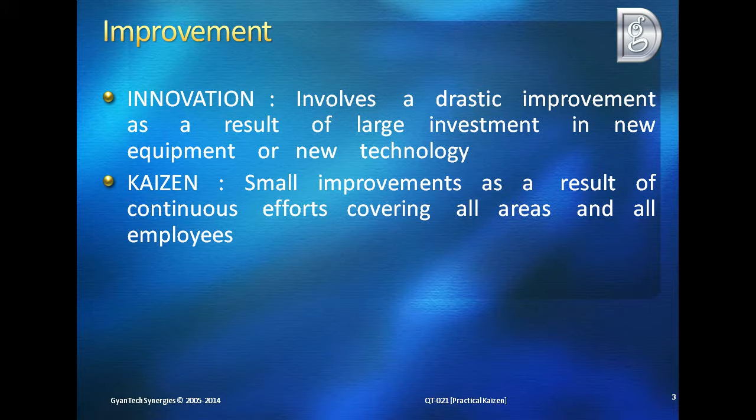Kaizens carried out in various plants of Suzuki Group have been compiled. Look for ideas which you can implement in your area. These Kaizen ideas have been categorized under the following groups:

Space saving, operation improvement, energy saving, weight reduction and making things compact, material storage and handling, quality improvement, 5S including environment protection, safety and accident prevention. Improvements in these areas will help in quality improvement, productivity improvement and cost reduction.

Space saving. Cost of space is a hidden cost. Cost of new covered space is of the order of rupees 7,500 per square meter. Add to this all the recurring expenses associated with space, such as expenses for lighting, air cooling and cleaning. In addition, when space is available, we tend to keep all unwanted things. This reduces our efficiency as more time is required to select the required item.

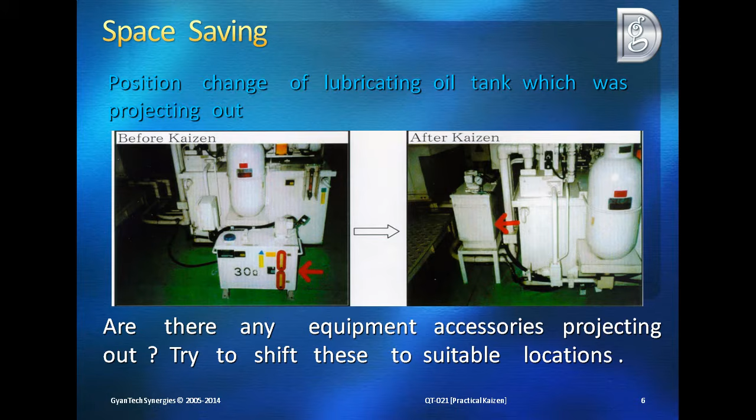Let us see the first example. In this case, a lubricating tank which was projecting out has been shifted to a location where it is not projecting out. Here, a hydraulic tank lying on the ground has been placed on top of the part shelf.

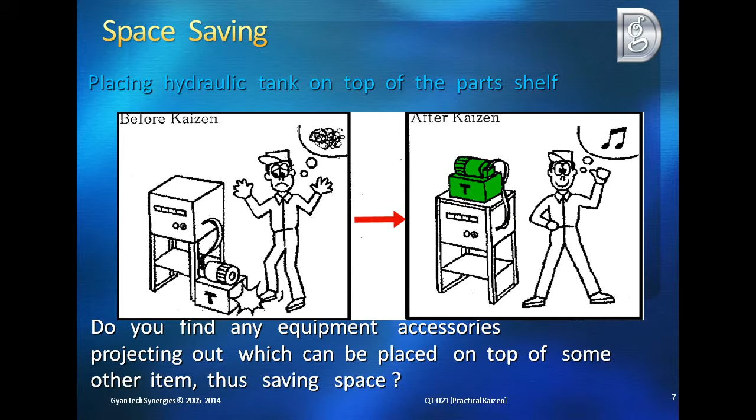Fans kept at ground level occupy space and cause obstructions to man and material movement. In addition, such rotating equipment and wiring associated with these are safety hazards. Fans should be mounted on pillars or ceiling.

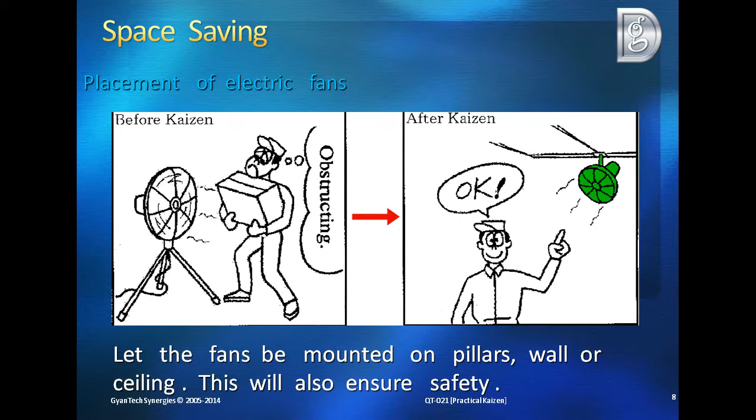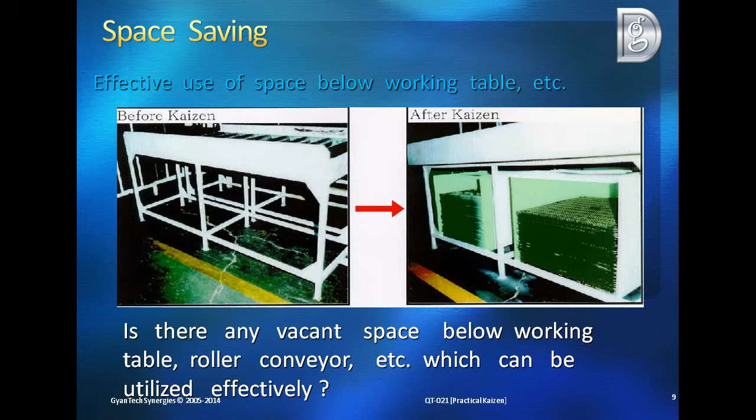In many cases, there is unutilized space below the working table or roller conveyor, etc. This space can be used effectively for storage of material. In this example, items which do not require use of the overhead crane have been shifted out of its operating range. The space vacated has been used for keeping dies, which require use of the overhead crane.

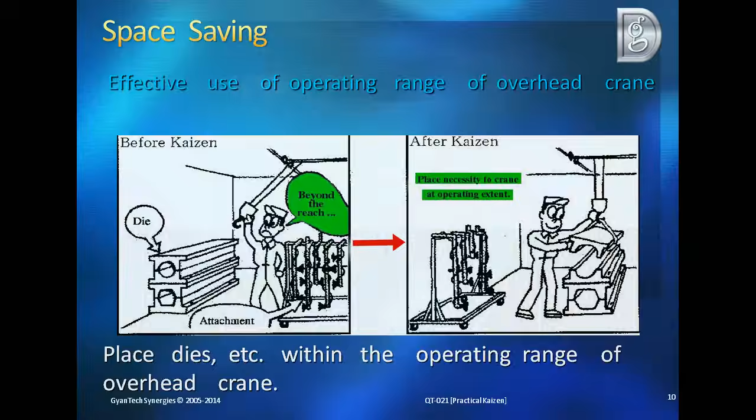Operation improvement. Whenever material handling operation results in operator fatigue, productivity will be low. By suitable modification of trolleys, loading of heavy objects can be made easier.

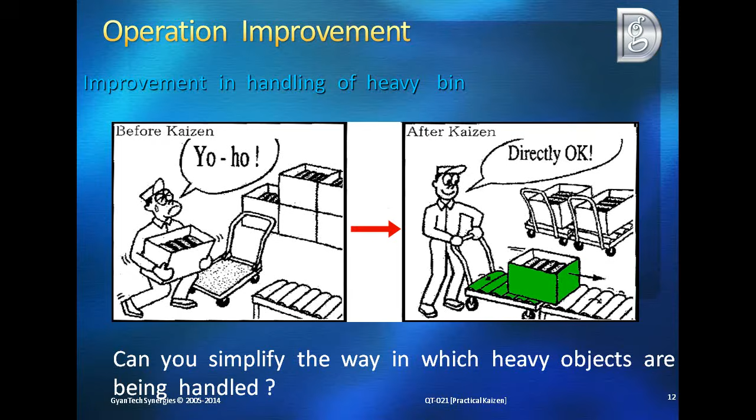Material handling work does not increase the total value of the product. It is unsellable work, so it is important to reduce material handling cost. It is required to reduce forklift operation as much as possible. Each forklift costs approximately 8 lakhs of rupees. In addition, there is a running cost which includes fuel, spares and manpower.

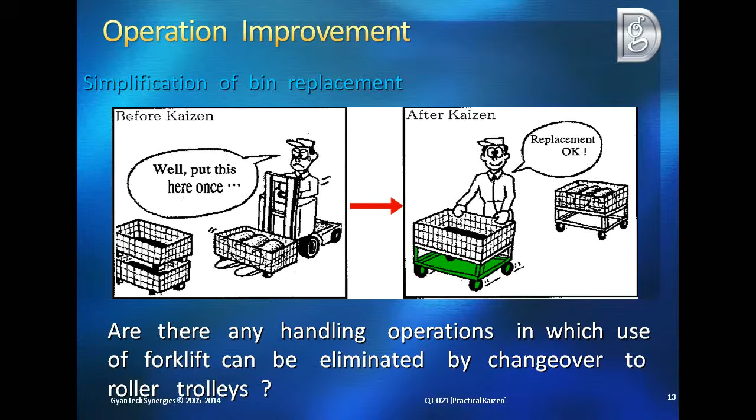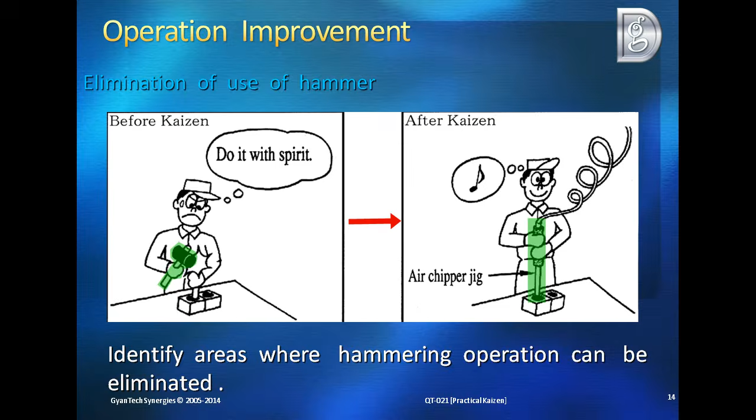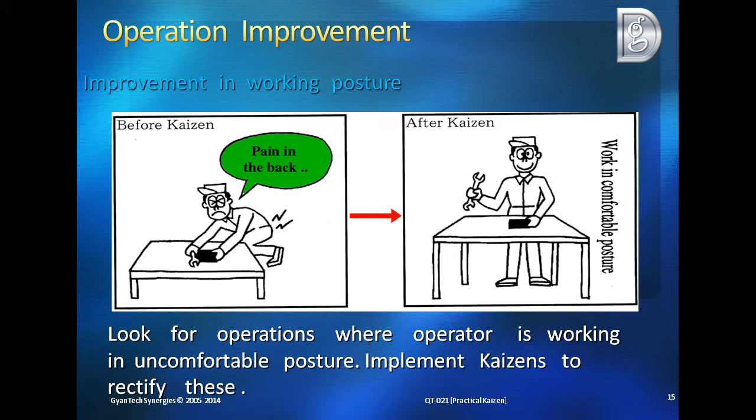One of the main reasons for poor workmanship and accidents is uncomfortable working posture. Implement Kaizens such as changing the height of the workbench, etc., so that the operator maintains a comfortable posture while working.

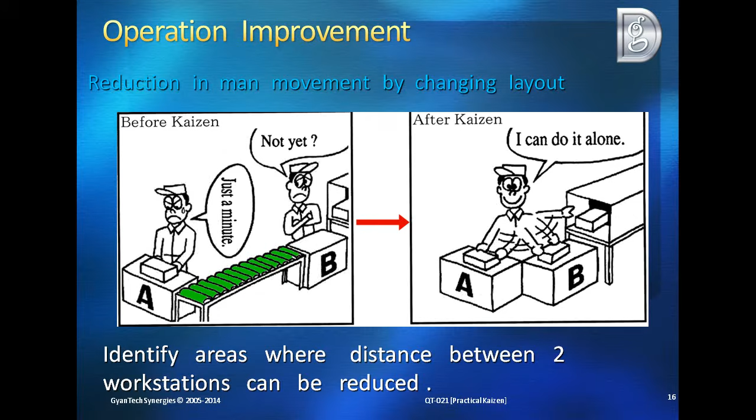A good layout to a great extent helps in improving productivity, quality and reducing cost. In the example shown here, the conveyor for in-process transfer was eliminated.

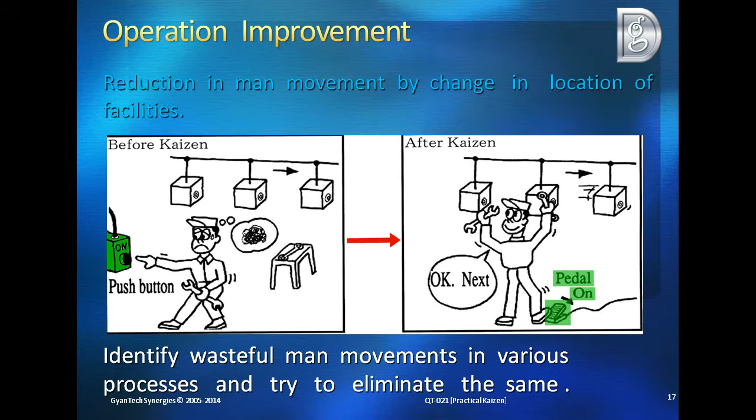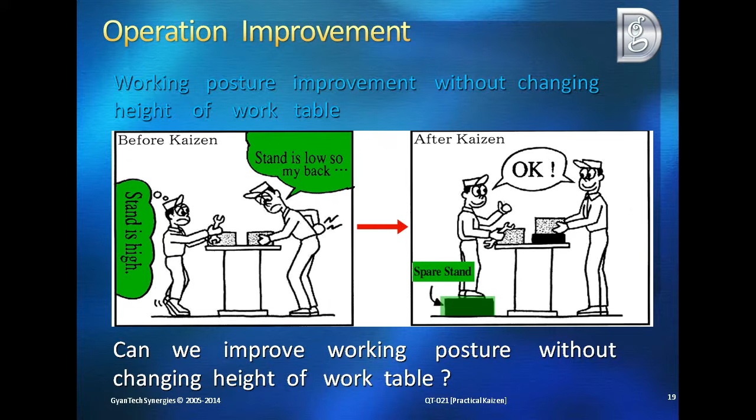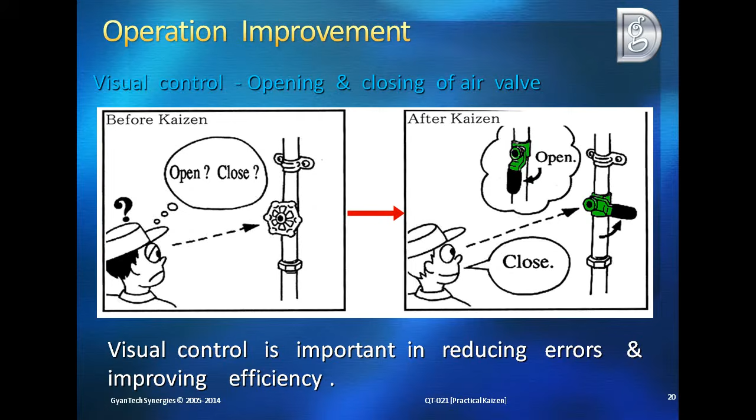Energy cost of our company is of the order of rupees 60 crores per year. There is a lot of scope for energy saving in all areas. Energy saved is energy produced. Even reduction of one tube light means saving of 700 rupees in terms of electricity cost in one year.

Illuminance is inversely proportional to the square of distance. So why not place the tube light closer to work? By bringing it closer, you may require only one tube light instead of two.

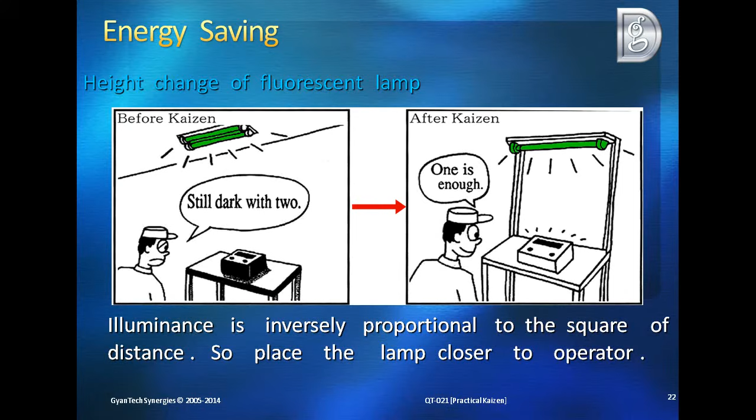Check for position of the tube light. Is it casting a shadow at the work area? Change the location for improved lighting. The standard for tube lights is not two tubes per set. Only if it is essential, install sets with two tube lights.

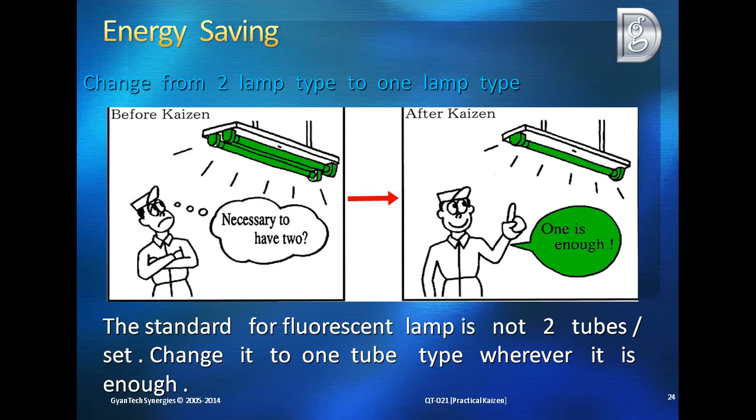In general, tube lights are hung from the ceiling. Wherever possible, place the lights on the machine itself. This will not only improve lighting with a lesser number of tube lights, but also save cost of lighting structures.

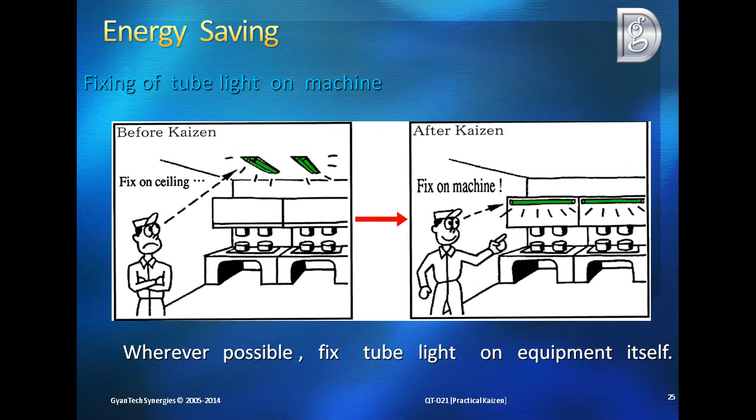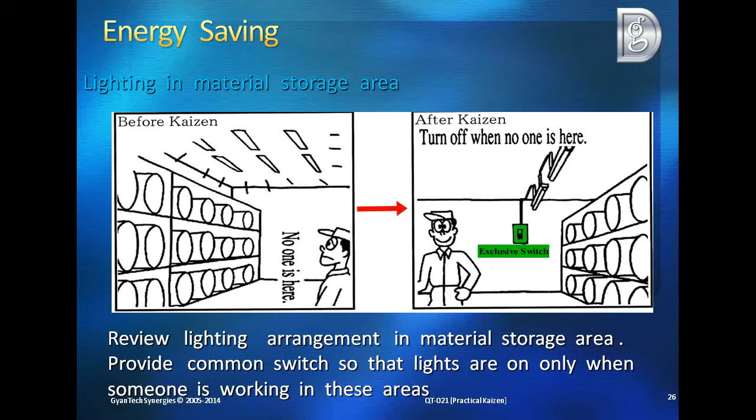In the case of storage areas, it is not required to keep the lights on all the time. A separate switch can be provided in such areas so that lights are switched on only when someone is working there. Instead of general lighting, one can go for individual lights above each workstation.

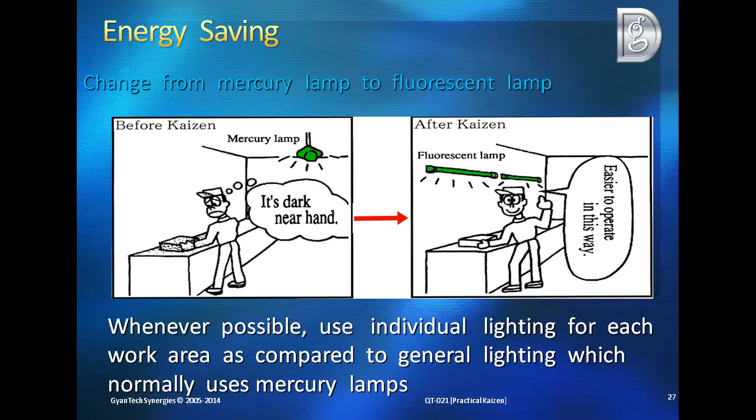Try to use gravitational force for material transfer in place of motorized conveyors. This way, you can save energy as well as reduce chances of line stoppages due to breakdown of conveyor motor.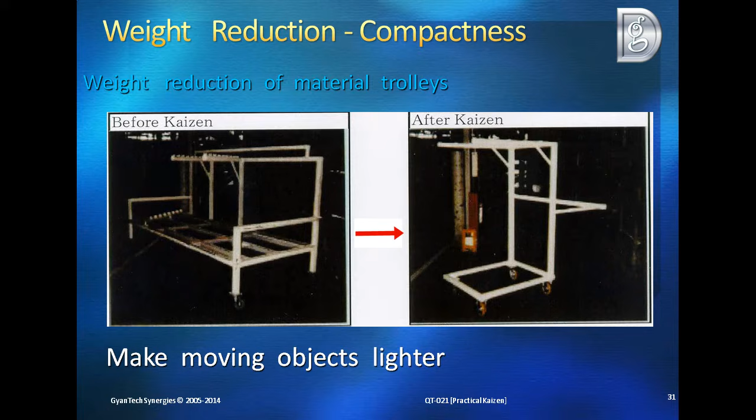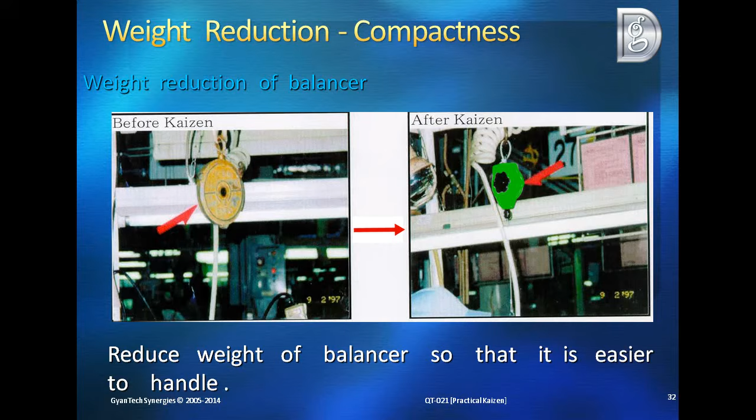This is one more example of weight reduction. Weight of balancer has been reduced from 1.5 kg to 0.3 kg in this case. Material handling does not add any value to final product. Eliminate multiple handling, reduce packing cost, and reduce material movement.

In this example, before improvement, the components were supplied in boxes. These boxes were loaded on trolley so that these could be supplied to line side. After improvement, the components are kept on specially designed trolley. This trolley itself is sent to the line side.

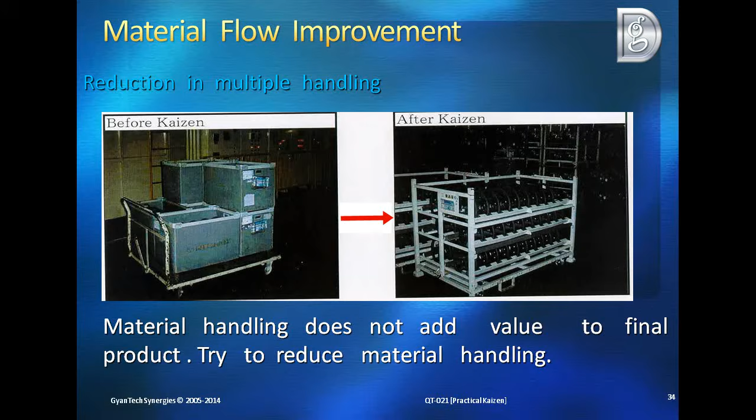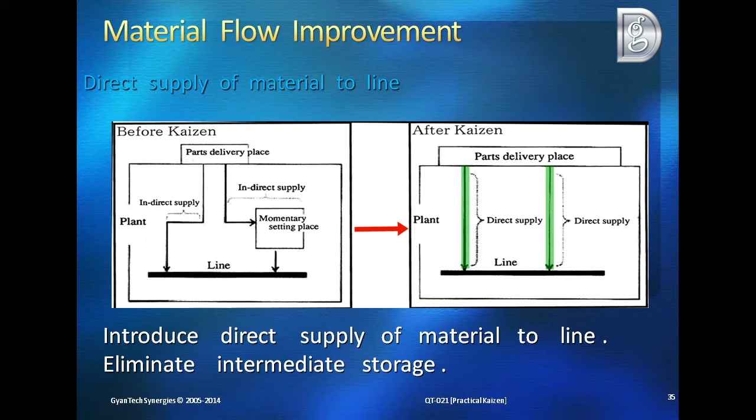Supply of material should be in straight line and without any intermediate storage. This way, you can ensure that material movement distance is shortest. Roller conveyors can be used for material transport from location of receipt to the assembly line.

This is a good example of how frequency of supply can be reduced by changing design of container. See if there is any excess space in container.

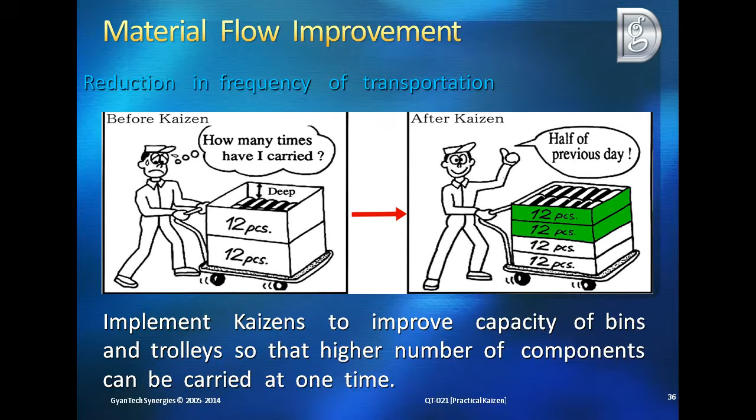Check whether double-layer storage is possible instead of one-layer storage. This way, you can improve storage capacity.

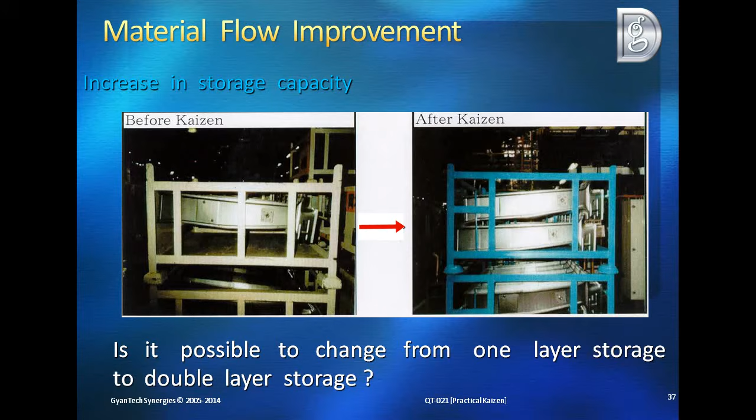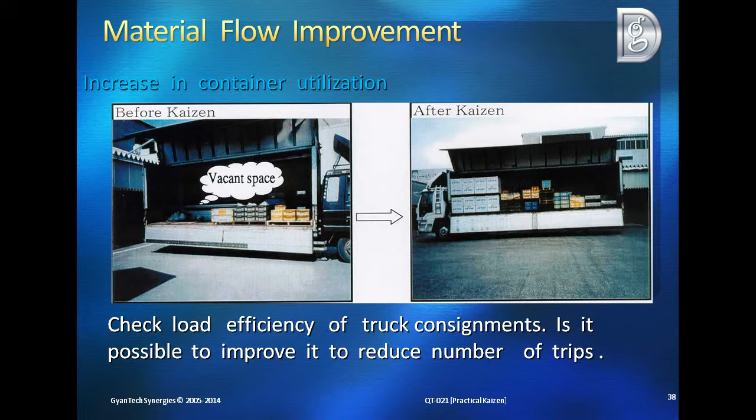This example illustrates improvement in space utilization in a truck. Study supply condition of components. Is it cheaper if the components are supplied in knockdown condition?

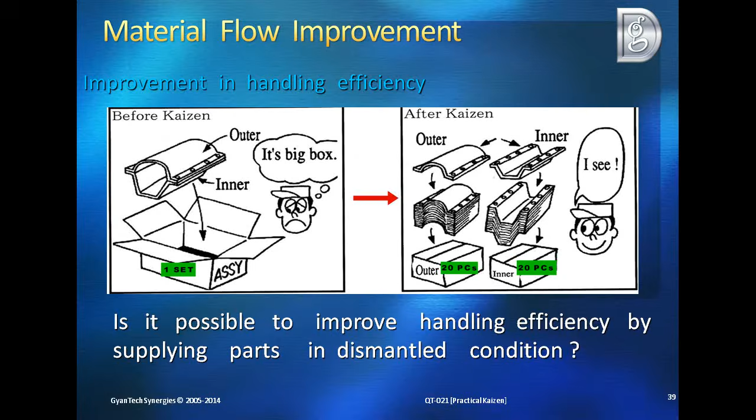Quality improvement. This example shows the type of countermeasure taken for preventing coolant spillage on bumper.

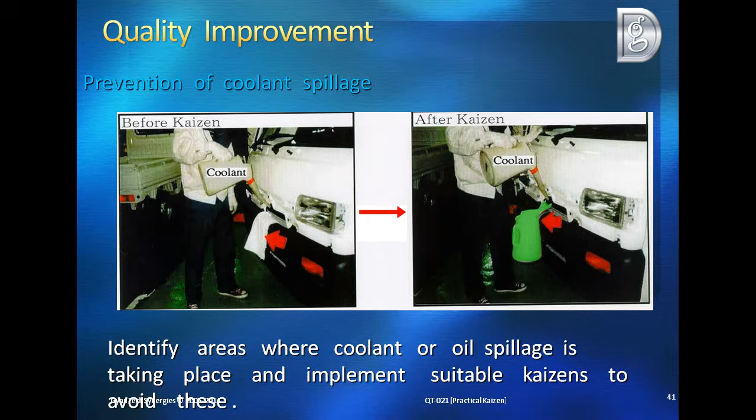Wearing watches or chains while working can cause scratches on car body. In this example, a clock was fixed on the wall so that it was not necessary for operator to wear a watch.

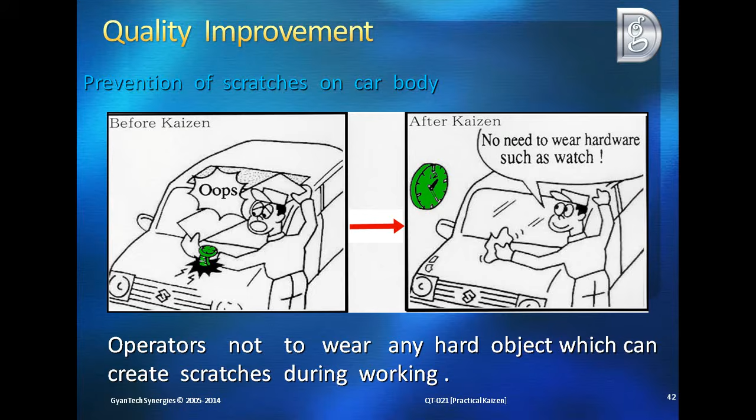Loose parts inside vehicle can cause irritation to customer. In some cases, these can cause serious defects. Think of Kaizens for eliminating this problem.

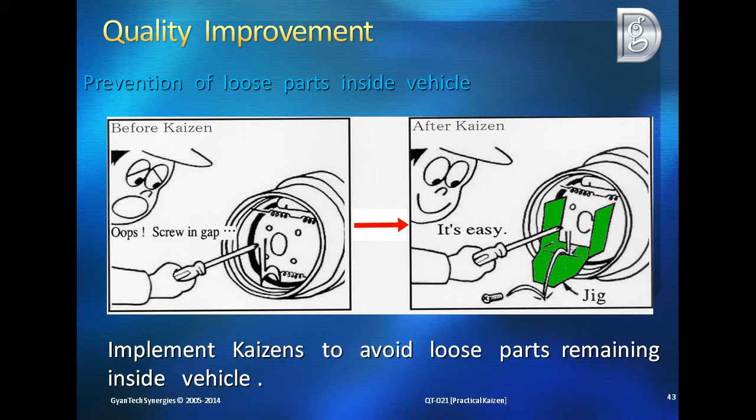In areas where inspection is being done, provide sufficient lighting so that defect is not missed by the inspector. Mobile lights can be used for better focusing of light on area to be checked.

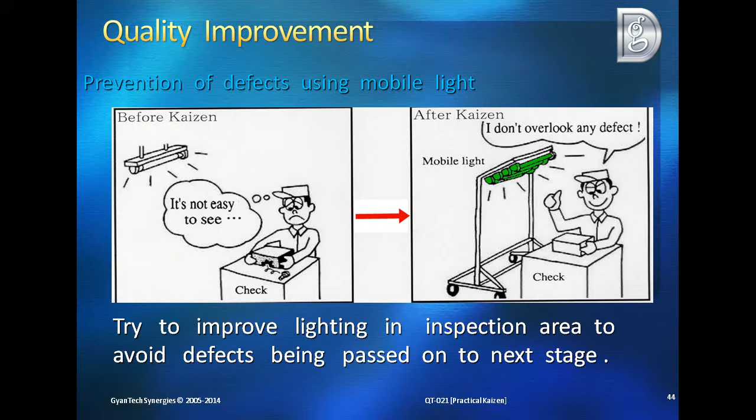Mixing of two types of components can affect quality. Think of Kaizens for eliminating chances of mix-up.

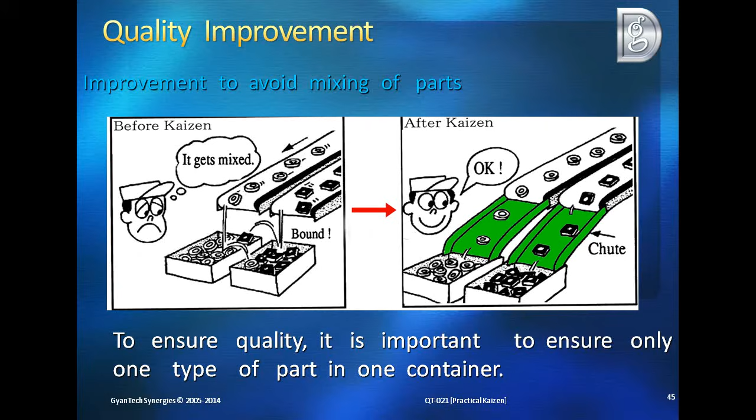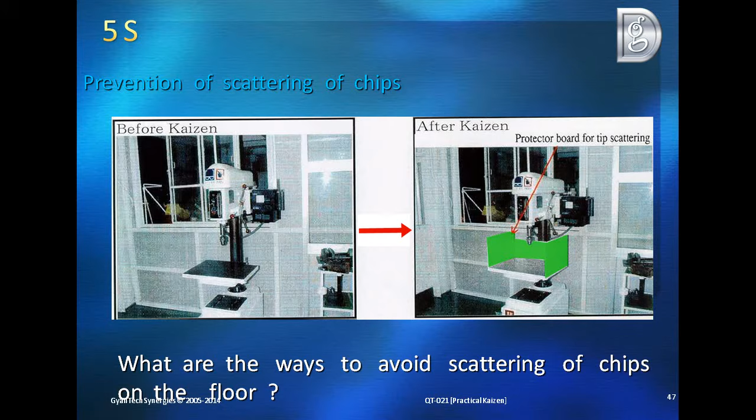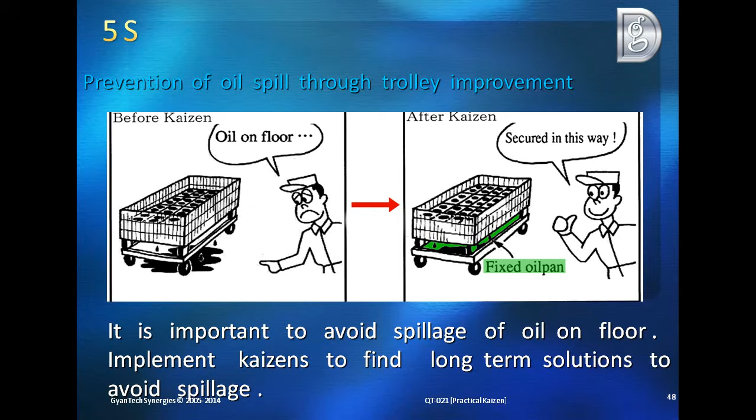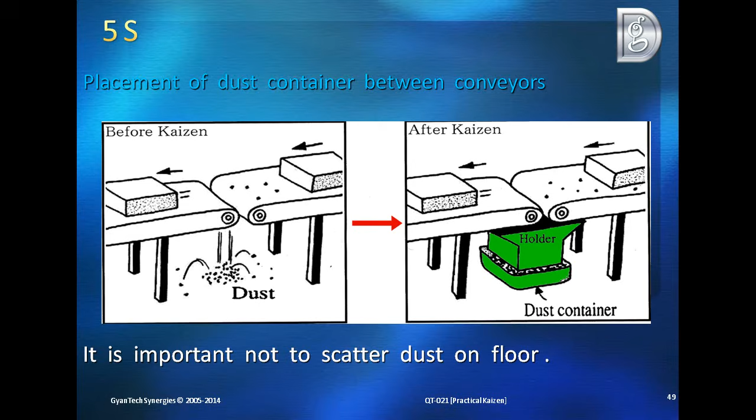The areas where scrap or dirt is being generated, it is absolutely necessary to provide proper container for dirt collection. In this manner, you can eliminate chances of floor getting dirty.

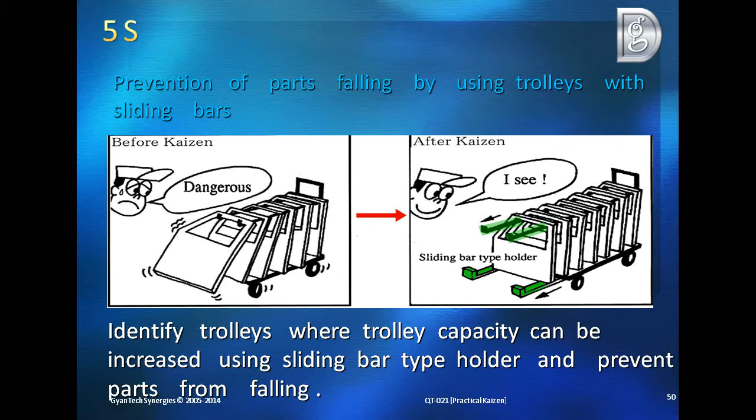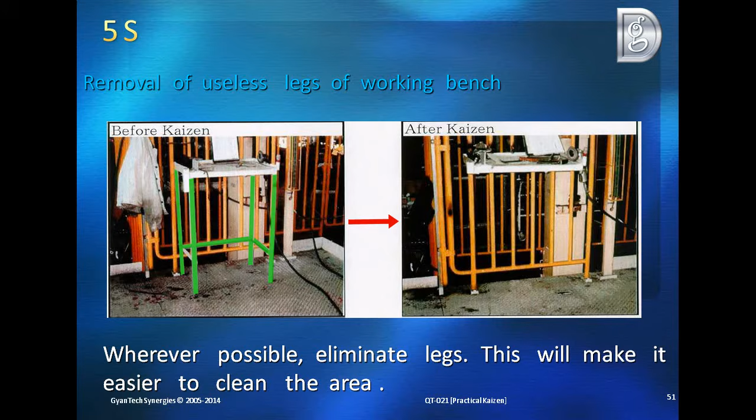Removal of legs of tables, etc. can make it easier to clean the floor. This is one more example of leg removal. Operation panel has been fixed on the machine itself.

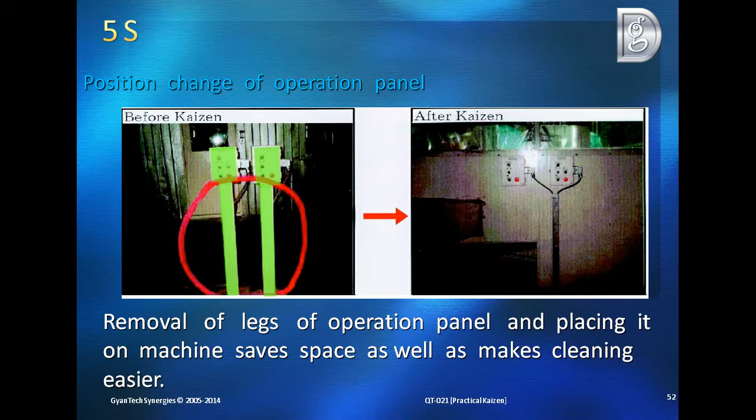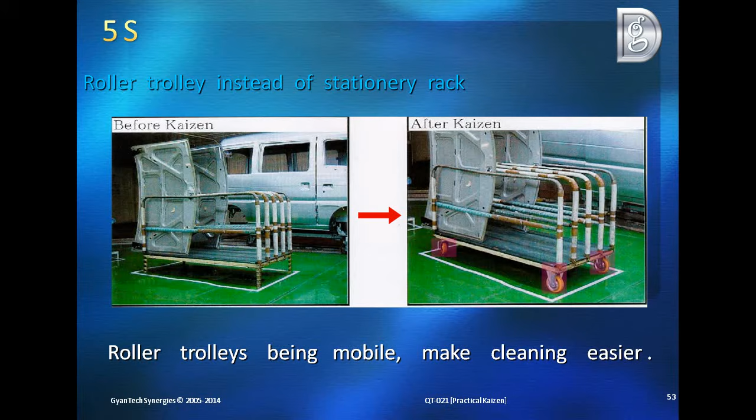Cleaning work has been made easier in this case by using roller trolleys instead of fixed type rack. Unorganized wiring not only makes cleaning difficult but can increase chances of accident. In this example, a duct has been fixed to channel.

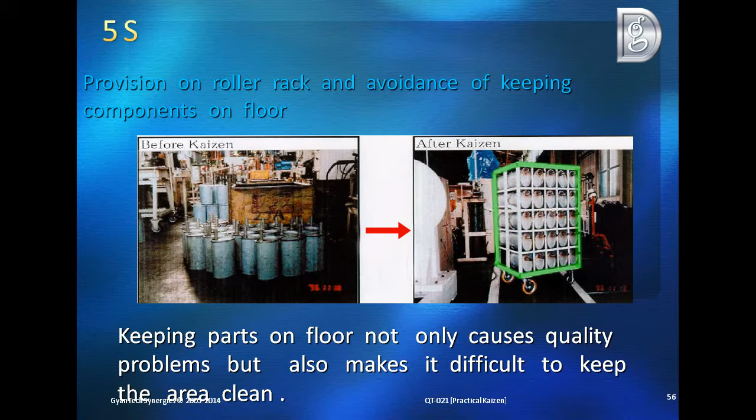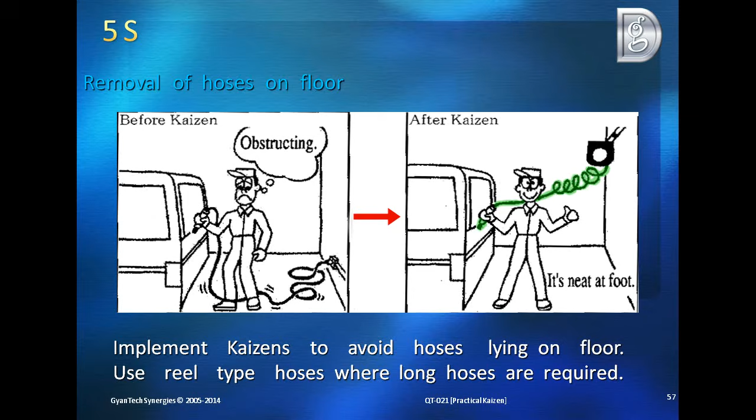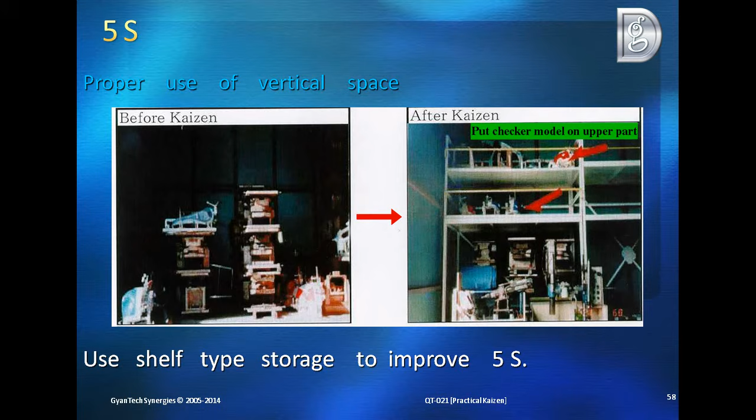Storage arrangements should be such that the contents should be visible from outside. Shelf should be of open type. This makes it easier to check inventory.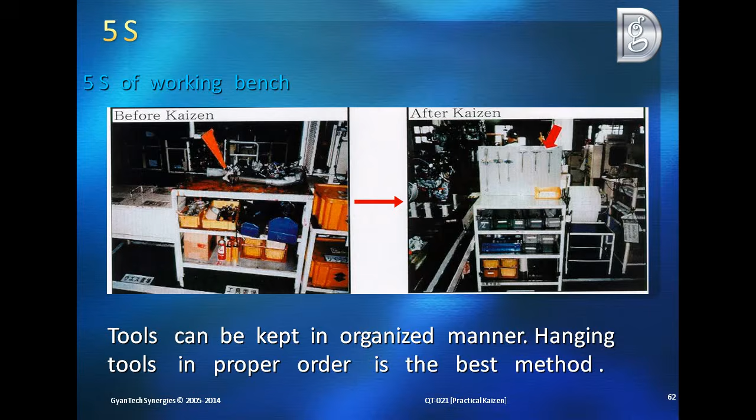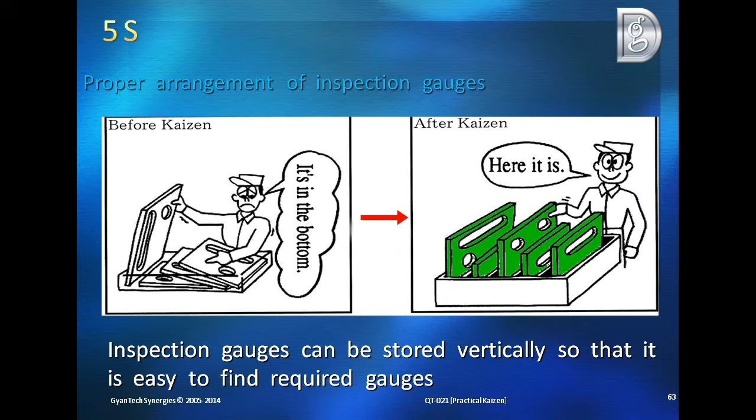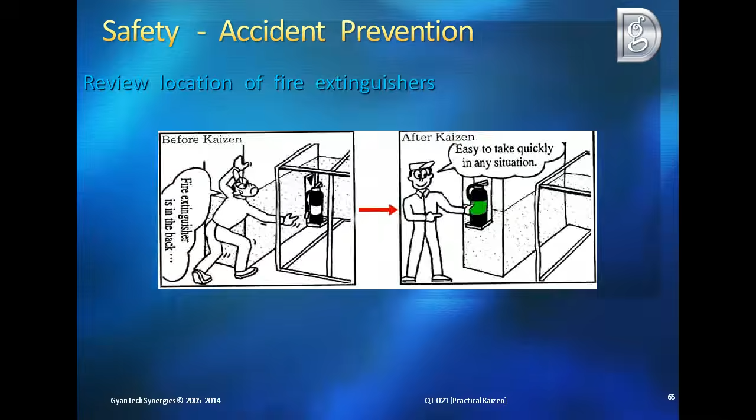Safety and accident prevention. A fire extinguisher is useful only if it can be located and taken out easily during emergency.

Review the locations of fire extinguishers. Is it possible to take these out easily in case of fire?

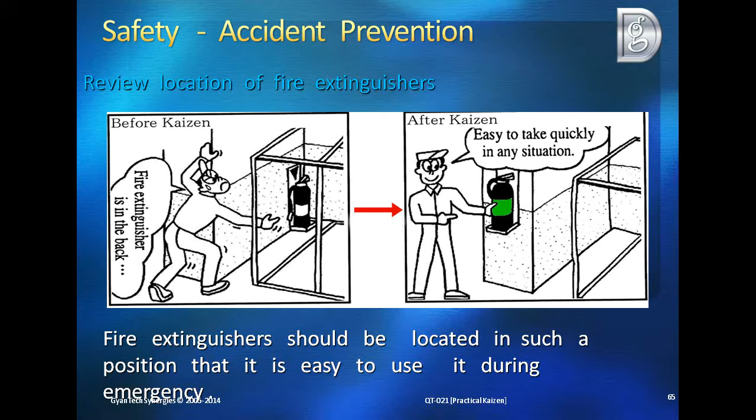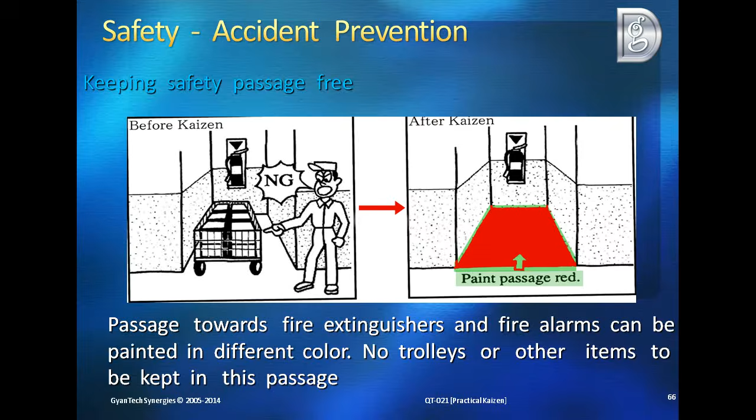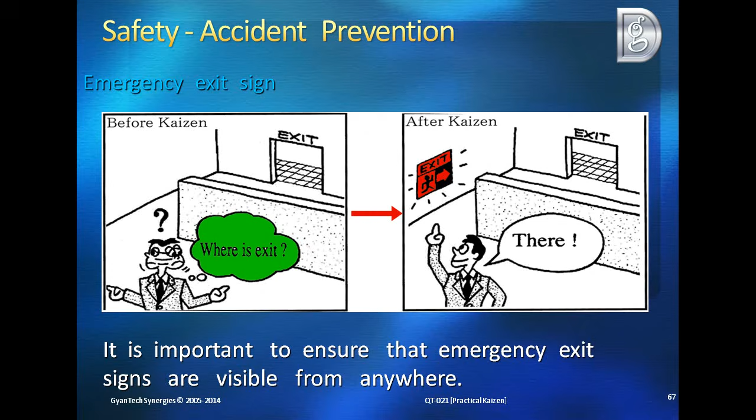Emergency exit signs should be visible from all sides. In addition to visibility, it is important that the keys for these are easily available in case of locked exits. Emergency lights should also be placed at suitable locations.

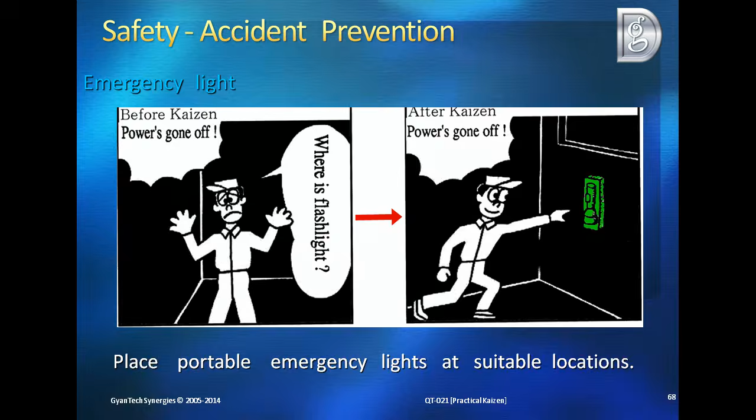Benefits available were: better 5S, improvement in safety as there are no protruding splinters or nails, improved durability, and lesser chances of fire.

These are only few indicative examples. Implementation of similar Kaizens in your area will not only make work simpler and more organized, but help in quality improvement and cost reduction.